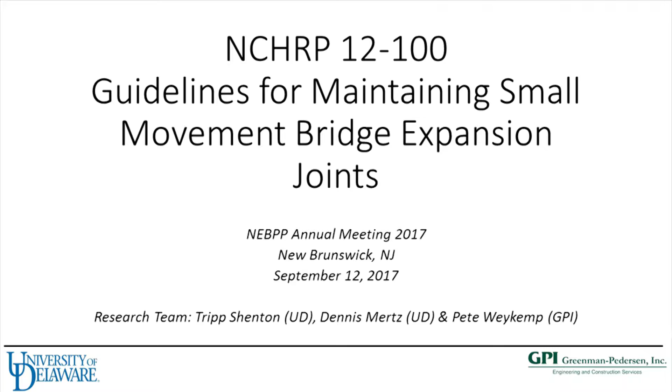What I'm going to be talking about is an NCHRP project which is completed. It's been finished for almost about a year now, but it did start quite a few years ago. Pete mentioned it just a minute ago. This was a collaborative effort between myself, my colleague Dennis Mertz, who passed away last year, and Pete Weykemp with

GPI. So this project, the statement originated out of the SCOM Bridge Technical Working Group a number of years ago, and that got pushed forward. It ultimately got issued as an NCHRP project. We were lucky enough to win the project, and it's now completed. But as you can see, the project was to develop guidelines for maintenance, repair, and replacement of small movement bridge joints. That was the effort.

And just to give a little bit of backstory to it, I've been involved with the partnership for, I think, going on six years now. And the Northeast Partnership had been talking about the performance of small movement joints. And there was interest within the partnership of doing a small research project looking at how small movement joints had performed in the Northeast. And so the partnership actually funded a very small project at the University of Delaware to look at just the performance of the joints in the Northeast. So we did that. I had a student work on that for about 6 or 8 months.

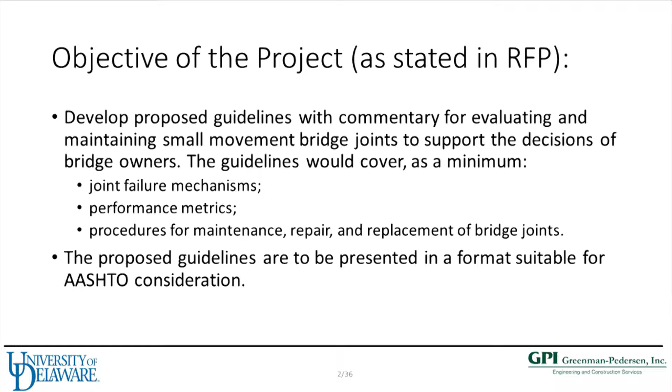The purpose of the project was to develop guidelines with commentary presented in a form suitable for AASHTO consideration. We had a whole range of different tasks. We started with a literature review and a survey. We did create a survey that went out all across the country. We surveyed owners, consultants, vendors, and contractors, all 4 groups of those stakeholders. We got a pretty good return on those surveys.

And then we had an interim report to do, and then finally the last part was to develop the final guidelines. Just to say, really, there isn't a lot of information out there on small movement joints. There wasn't, and there really isn't too much out there today. Frankly, to be honest with you, as a researcher, as an academic, small movement joints just aren't terribly sexy and snazzy, and not a lot of money has been thrown at them over the years. It was nice to see this project, and I hope going forward there is some more work done in this area.

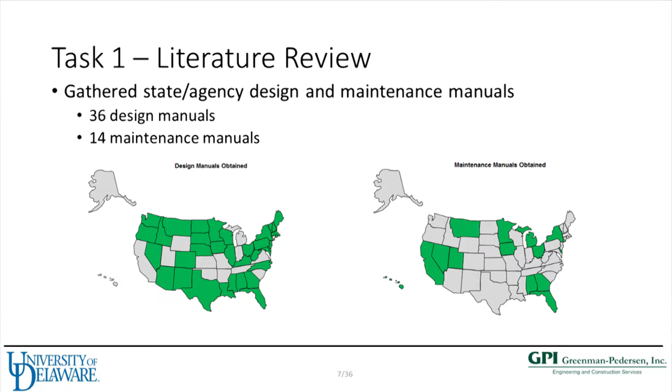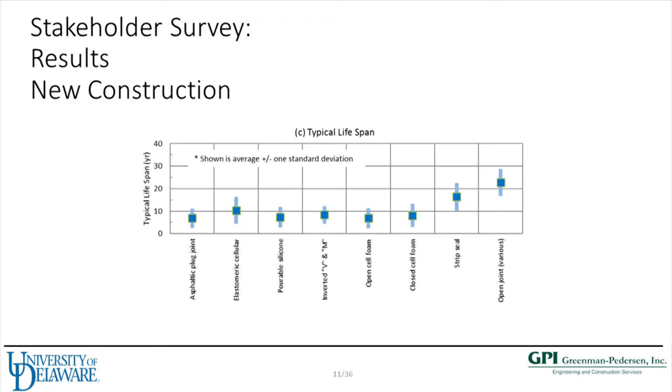We gathered information from the states, getting their design manuals, their maintenance manuals, gathered a pretty good, fair number of them. As I said, we did the stakeholder survey. We asked a lot of questions about performance, types of joints owners were using, how well they performed. This is just one of the graphics. If you want to see some more of the details of these results, those are all in this Part 1 report. So if you want to see, again, it was a nationwide survey. You want to see more details about what types of joints are being used most often and how well they're performing, that's where you could find that.

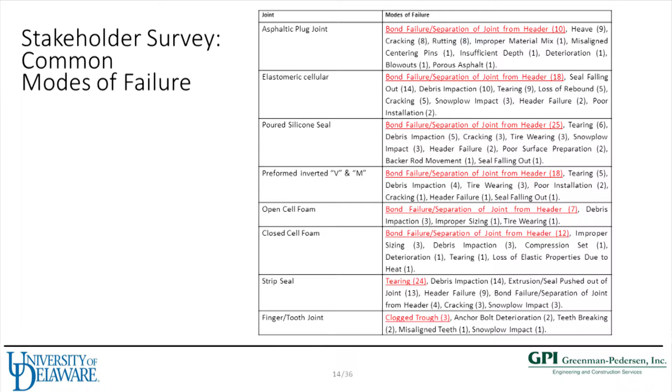We were asking information about service life for different joints and types of joints that people are using. We also asked about modes of failure because we had to include that in the guidelines. But now to get to the draft guidelines. And so this is the second document, which is the one that hopefully will be published by AASHTO, either in this form or perhaps in a slightly revised form if the SCOM decides to go ahead and review and do some editing. But this is the table of contents. We go through types of joints, modes of failure, evaluating joints, calculating joint movement and sizing the seal, selecting a replacement joint, preparing the header.

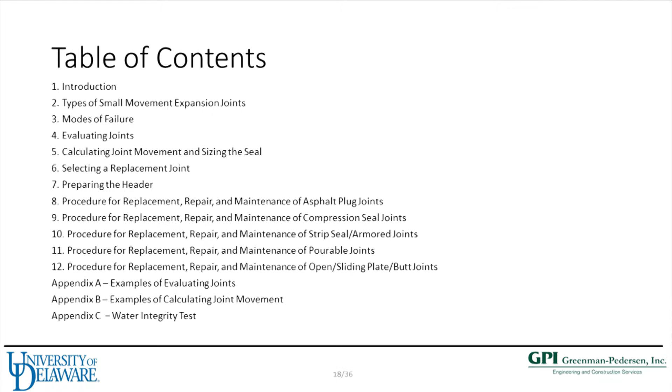Let me say, throughout the whole project, we had an awful lot of feedback and communication with all of these stakeholders. We got a lot of information from the owners. We got a lot of information from the vendors. When we had a solid draft of the document ready to go, we turned it back out to stakeholders, and we got specific feedback from the vendors and from the owners, and so that all ended up in the final product. So we feel like we did a pretty good job of listening to all of the stakeholders as we developed this. The last 6 sections, there's a pretty detailed description of how to replace, repair, or maintain the different types of joints. Section 7 goes into just headers, and then from 8 through 12 is pretty detailed step-by-step procedure for replacement, repair, and maintenance.

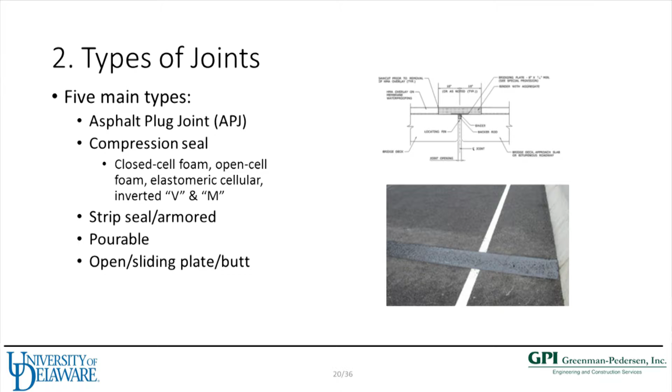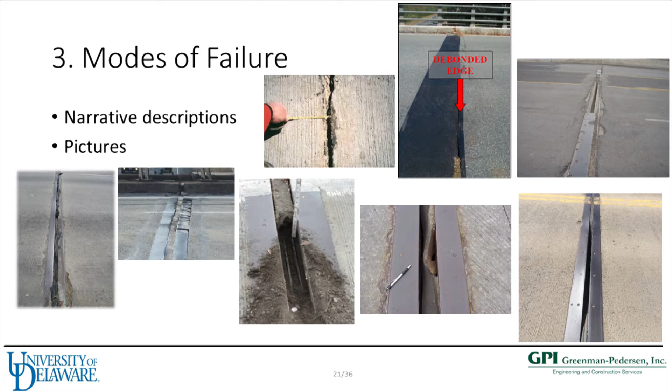Types of joints, we classified these into the 5 general classes. In each one of these, we have pretty decent schematics, and it's interesting. We have a lot of pictures in here, and it's pretty easy to find good pictures of damaged joints and joints that have failed, but it's surprisingly not so easy to find good pictures of brand new joints. Most people have a lot of the pictures that aren't so pretty, but not too many of them when they've just been put in. But we did the best we could there. Modes of failure, descriptions and pictures. Evaluating joints, we proposed a method where we're linked to the AASHTO Manual for Bridge Element Inspection and condition states. A section on calculating joint movements and sizing the seal.

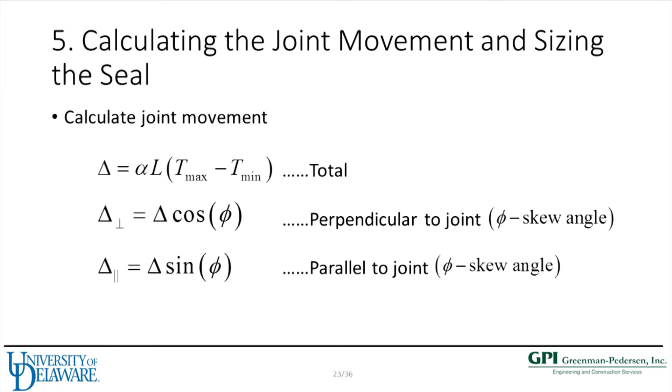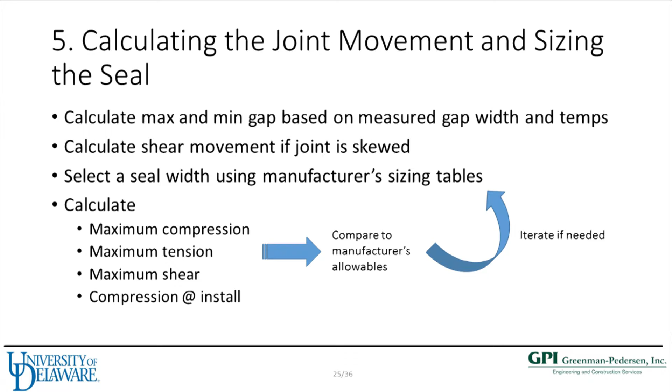As I said, we gathered a lot of information from owners from all across the country, whether these were design manuals, maintenance manuals, detail sheets. There was a pretty good amount of information, but when you gather it all up and you look at it, you realize it's all over the board. It's in different formats. It's presented differently, different terminology. It's kind of all across the board. So we did our best to take best practices, incorporate them into the guideline, and present it in a consistent and coherent manner. Sizing the joints, you'll see a section in that. Calculating max compression and tension and shear in a joint. Selecting a replacement joint, this is where we had to look into performance metrics, and you'll see a table in there which addresses that.

Let me also say that the NCHRP review panel, which guided the whole project, there were 8 members on that panel. 7 of them were from the states. There was 1 academic on the panel, and from all across the country. So the 7 from the states, they represented design, maintenance, operation, all the areas that would be relevant for looking at joints.

One thing that they wanted us to include in the document was, all right, suppose I have a strip seal and I want to replace it, but somebody says, well, why don't you put a plug joint in there? Well, what's going to be involved in going from a strip seal to a plug joint? How hard is it going to be? What's going to be involved?

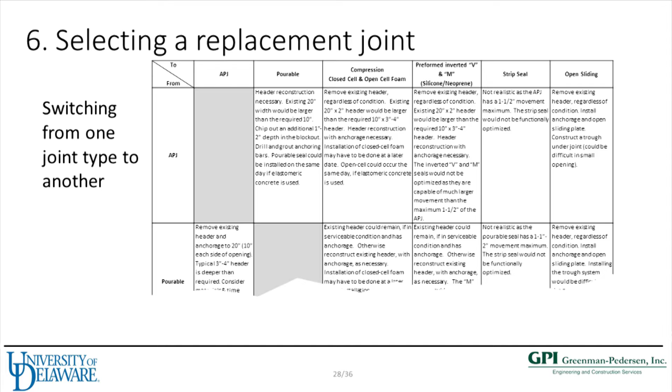So you'll see kind of a big matrix. It actually flows over about 3 pages, but it takes all the classes of joints and says, okay, if you want to replace this joint with this type of joint, what are you going to be facing? Not in tremendous detail, but just a short description of the kind of things you'd have to do to make that change. Then we get into these detailed sections about how you do these operations, and they're full of pictures.

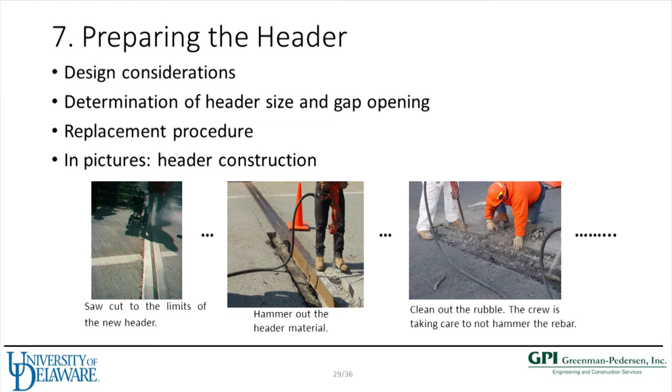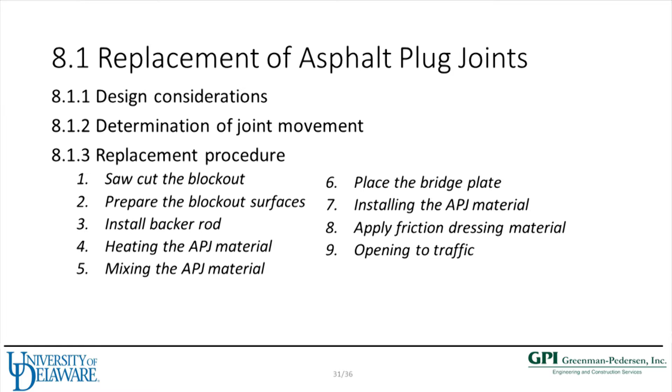Pete mentioned these and showed some in his presentation, which I think are tremendous, and it's been a nice part of the whole product. But step-by-step procedures along with pictures at the end there. And then for each of the major 5 classes of joints, you go into this replacement, repair, maintenance, and all the detailed steps. And these do go into fair detail. There's a lot of textual description of the various steps, and then at the end there's a lot of pictures.

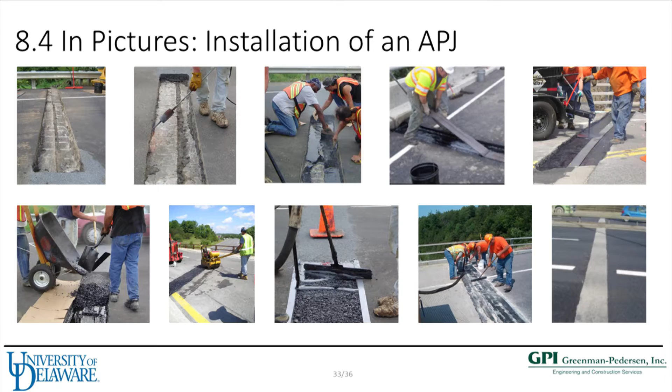And so here's, I think, some of the same ones that Pete showed in his, but just for the asphalt plug joint. Nice pictures that show the steps. Unfortunately, it would have been really nice to be able to go out for all the types of joints on a site and take photographs from start to finish. We weren't able to do that, but from various sources, many of them coming from Pete, from his archives, we pulled together these good pictures that show the steps for all the different types of joints. So you'll see that.

As I said, the project was completed just about a year ago. At that point, the reports were submitted to NCHRP. You can get these if you just go to the TRB website, trb.org. The easiest way to find them is there's a menu that says projects. Just click on the projects link. When that drops down, you can put in the project number, which was 12-100. That'll come up with the project. You hit the link there, and you'll see the links to the 2 PDFs at the bottom, and they're already there for you to download free of charge.

As I said, the AASHTO SCOM Bridge Technical Working Group through Jeff Milton is moving to get this published by AASHTO, and so hopefully that'll happen soon. And just acknowledge all those who helped. I imagine many of you took the survey, so thanks for doing that. But all the various stakeholders, the Academy, NCHRP, the project manager, et cetera, all those people.